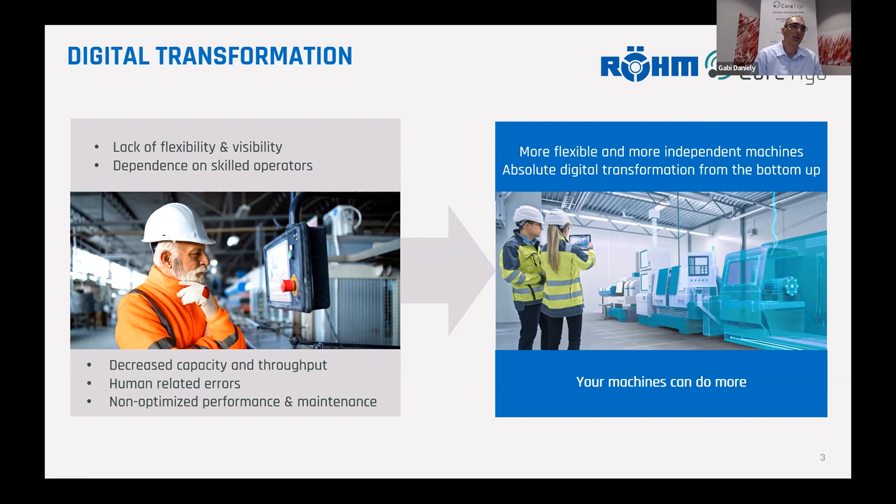As Gordon was talking about IO-Link Wireless, a key component of this solution is actually IO-Link Wireless. It serves as the communication means for this solution, and it's creating a paradigm shift because it's breaking the limits for machine connectivity solutions and applications. As mentioned, IO-Link Wireless is an extension of the well-known IO-Link standard, so it's an official global IEC standard. It was designed specifically for factory automation and the harsh environment of factory automation.

It has cable-grade reliability—literally 1 million times more reliable than any conventional existing wireless solution. So you take Wi-Fi, Zigbee, Bluetooth, this is a very high reliability that's pretty much cable-grade. It has low latency, which enables it to deal with high-speed and motion solutions, and also scalability to support hundreds of devices in a machine area or work cell area.

If we take all this, it actually enables us to do many actions while in constant motion. Gordon showed some examples also, doing all this in very harsh conditions. This enables machine connectivity pretty much anywhere, even in places that weren't possible before, where we were limited by cables or complex layouts. And in turn, it also enables us to create smarter and more intelligent devices at the edge—so it's not just the communication, but the intelligence that we're applying at that edge that is being communicated.

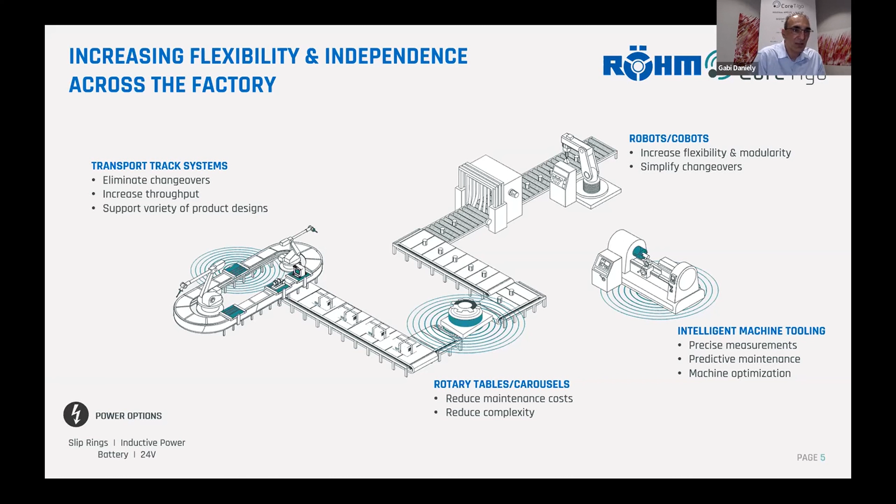This is what has never been sensorized before. Nobody knows exactly what clamping force is used for holding the workpiece. And also we are transferring data at high speed rotation in harsh conditions. We have water there, we have cooling liquids there, and it's a really great leap in sensorizing elements in the clamping industry.

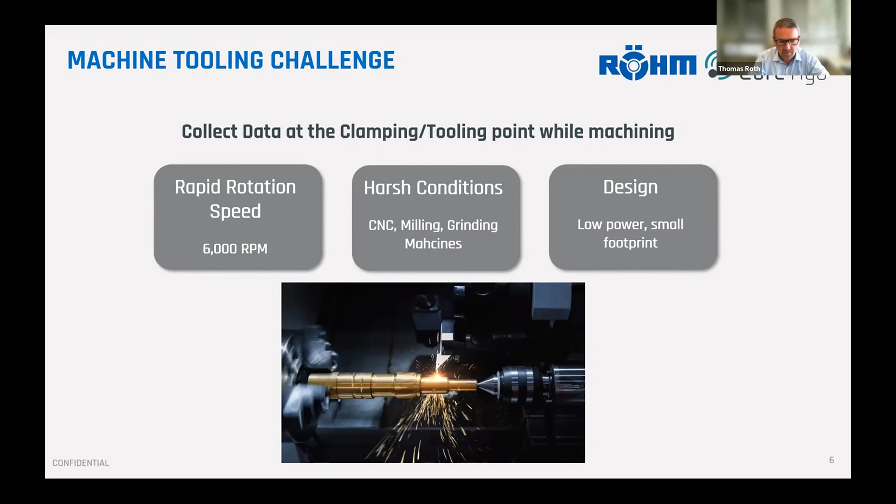They have applied the system and introduced it right now at their show, at their open house, which is taking place this week. They have integrated our system as an option in their machine, so we made a great step forward in the application, the usage of the system.

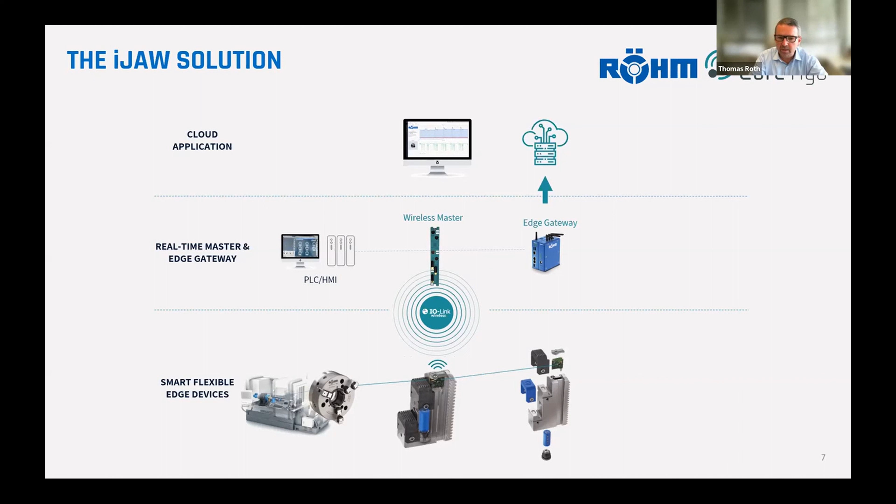If we see what force is being set to the workpiece, we can derive measures. In this case, for example, we can also measure the temperature, and we can see that the temperature at the workpiece gets higher. And if the temperature at the workpiece gets higher, the material expands. And if the material expands, the clamping force certainly gets higher - this is what we see there. And if we do not want deformation of the workpiece, we have to reduce the clamping force, or we have to add cooling liquids.

This is one of the cases which is only possible by the visualization of data. So the sensors, IO-Link, and the visualization of data on PLC or cloud systems make it very helpful to produce better workpieces, reduce downtimes, reduce security issues, and make the process more easy and more reliable.

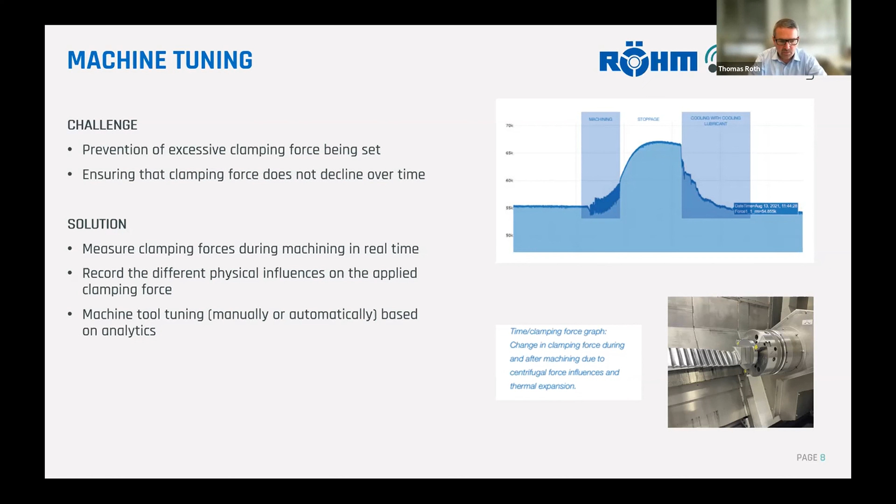The core of our system is the measuring of the clamping force in real time during machining, and this is really important. Before, it was possible to measure the clamping force not during the machining process, with some tools, but this is not the most important information. The more important information is the clamping force during the machining process, and only cable-less IO-Link systems enable this.

For example, what you see on the right side in the blue chart, you can see that the trend of the curve is decreasing, and this means the clamping force is decreasing over time. That means I have, at the right time, the information that the clamping force decreases, and I have to intervene and enlarge the clamping force again, so I do not have any problems during the machining process.

When I know that the clamping force is decreasing, I can set a service, for example. I can plan maintenance, I can plan a repair, and all these things I can do in advance, so that I have planned downtimes, which are better and shorter. If you're working in the machine tool industry, you know what I'm talking about.

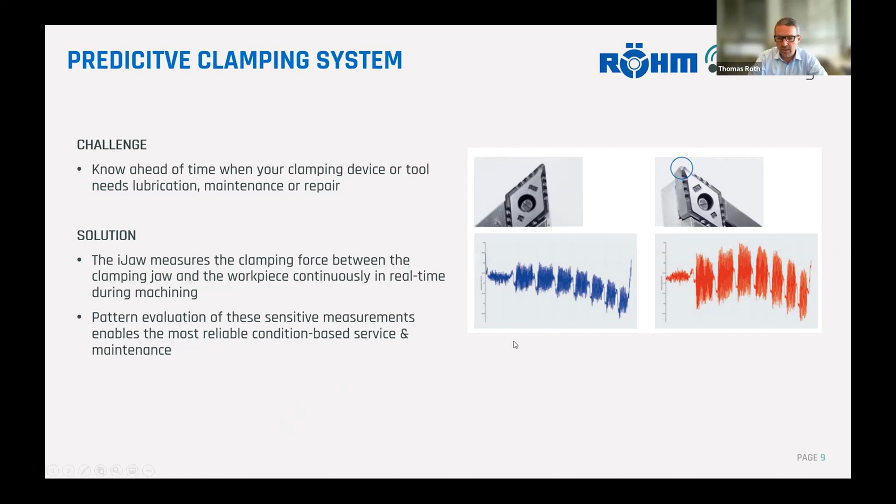Okay, we can go to the next slide.

The precise setup: most of the time you put your workpiece by hand into the system, and you have to put it very precisely into the chuck and the jaws, and place the piece into the machine.

Sometimes it can happen that the piece is not at the right angle in the machine, and there is some non-circular run-out of the machining of the workpiece, and this is certainly not optimal for the symmetry of the tool, for example if you are turning.

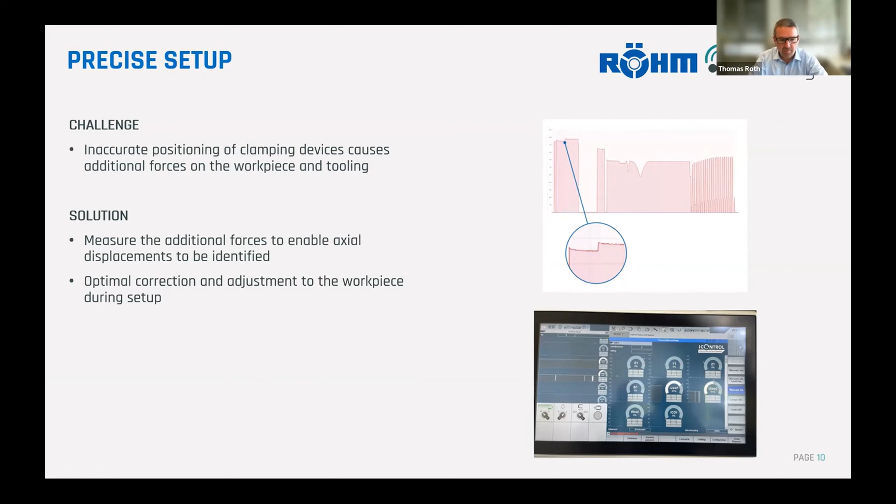If there is a deviation in the measured clamping force, I can also identify that something is wrong, have a look at that, go deeper into the system, and fix or adjust the workpiece into its right place.

Documentation, and I'll add analytics a little bit to that. What I get, as we've heard before, is a data stream, a non-ending data stream during machining of my clamping force into the cloud and into analytics systems, for example.

I can use these data streams to look at the clamping force right during the machining process, but I also could have a look at these forces afterwards. If I have to find out if some of the pieces were not milled or turned very well, I can also see it in deviations of patterns of the stored and measured data. What I can also do is see downtimes, for example.

I can identify how long downtimes during the machining process were when I measure and record all the machining data, because it's fluent, permanent data. And if the system is not running, there is no data.

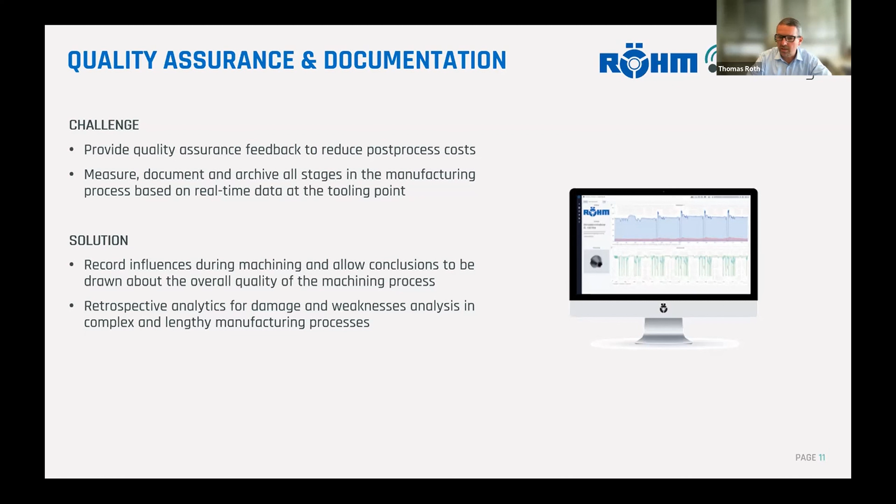This is similar to what I mentioned before. If you put a workpiece automatically into the system, you can look at the data, and if you know how the data has to look when the workpiece is placed correctly in the machine, you can compare it with the information you see here. If the diagram or curve has a deviation from what you need to see, you know the workpiece is not successfully placed in the machine, and you have to react and correct the issue.

So you save time because you avoid a security breach or a breakdown, since you can see in advance what has to be corrected, and you can install the workpiece perfectly into the machine, so nothing should happen during machining.

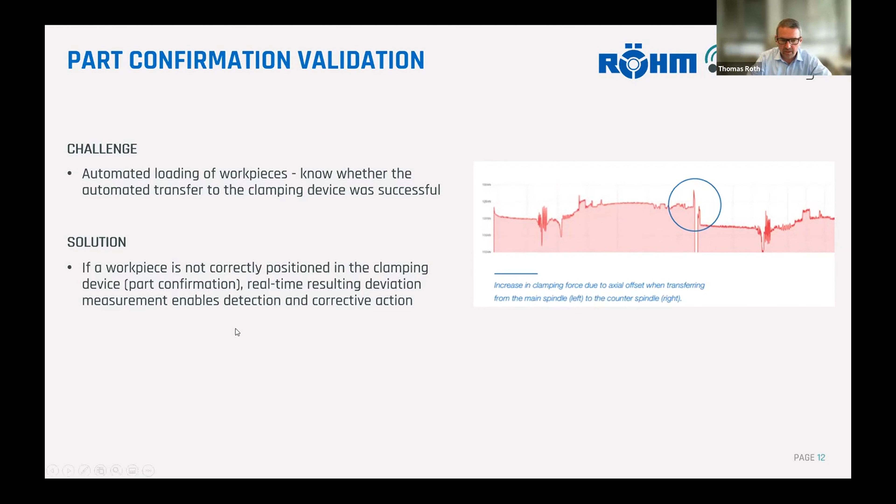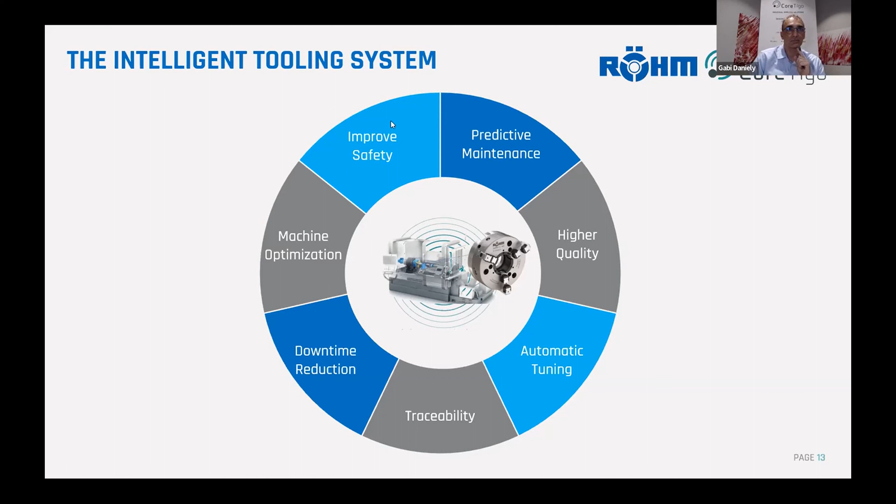That's it from my side. This is a short overview of our showcase. If you want to go deeper into details, feel free to contact us - we can go deeper in detail, but at this point I think it's enough to show how we bring data at the right time, at the right place. As Naresh said in his introduction, make data visible and use the data for improvements.